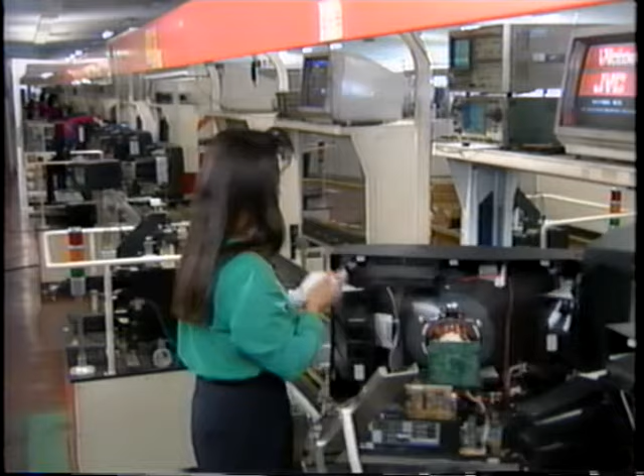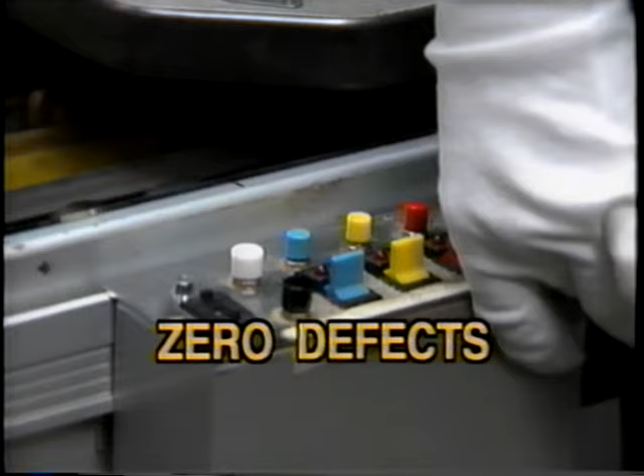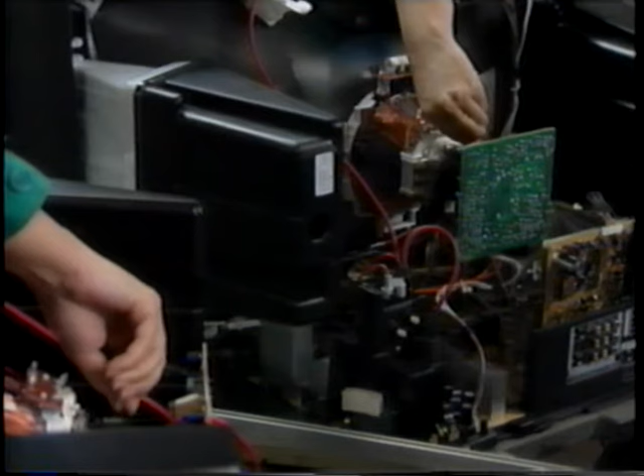The life and soul of all production is guaranteed quality. There are slogans in most factories stating defect reduction targets, but the ultimate aim should always be zero defects. The vital point to remember is that even if we only produce one defective product for every 10,000 produced, that item is still 100% defective to the person who buys it. Poka-yoke, or mistake proofing, is a vital factor in eliminating defects altogether.

Hello. Has it ever crossed your mind that factory production is very similar to creating music? Waste-free production is just like perfect harmony. In music, there are three basic elements: melody, rhythm, and harmony. Each of these elements can be considered beautiful in a skillfully played, well-composed piece of music. The same three elements of melody, rhythm, and harmony are also essential features in factory production. Let me explain.

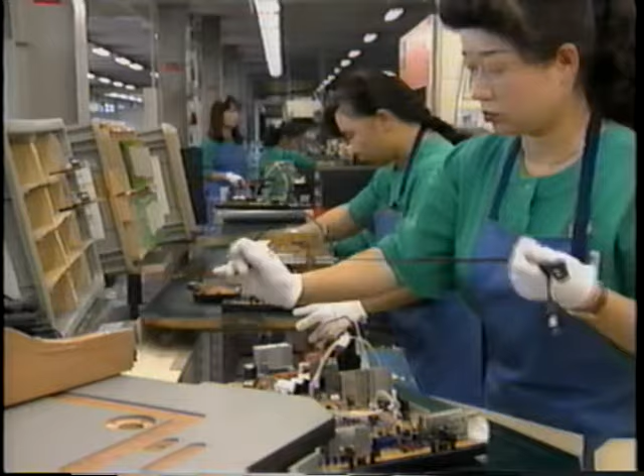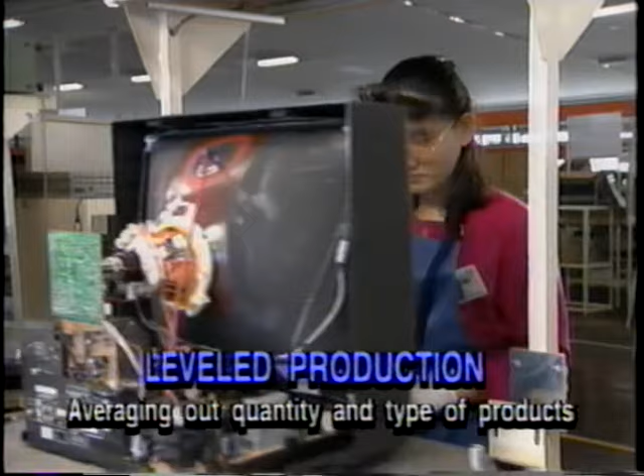First, melody. The flow of items during processing can be regarded as the melody of production. This melody can take many forms: straight line flow, U-line flow, one item at a time flow, and also large lot flow. So melody is found in flow production. Second, how about the rhythm? This is represented by the pitch required for each product. It's expressed as the takt time of leveled production, which is the ideal cycle time.

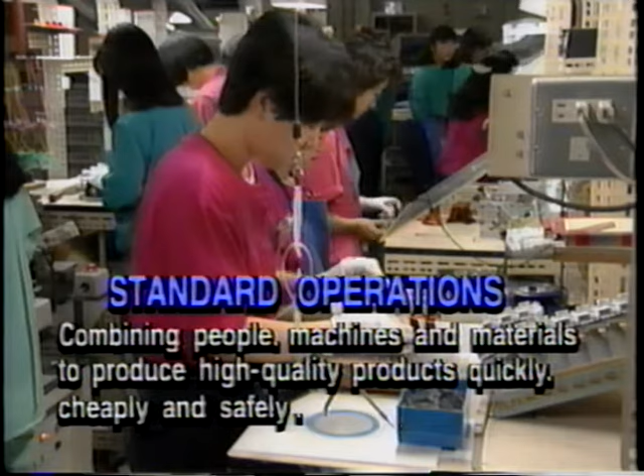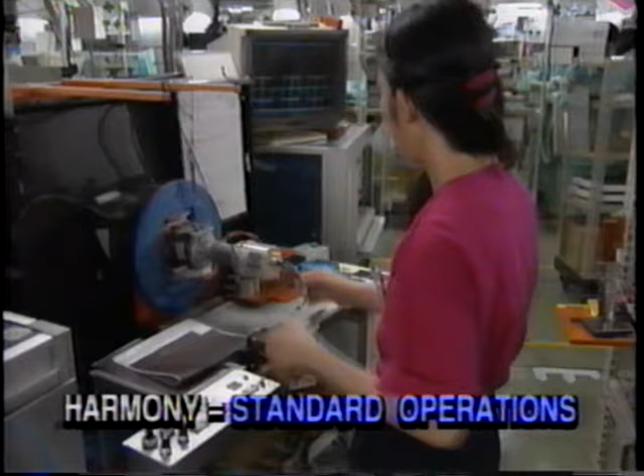And the third element is harmony. In other words, an effective combination of different sounds. Of course, a poor combination leads to unpleasant disharmony. In production terms, harmony is represented by standard operations. They integrate people, machines, and materials into a seamless, harmonious whole in order to create products in an efficient way which is free from waste.

As you can see, the same three basic elements of music are factors behind effective factory production. Flow production creates a melody. Leveled production establishes the rhythm. And standard work procedures build up production harmony. But what happens if something goes wrong? In the case of music, if the melody is unclear, the rhythm unstable, or the harmony off-key, then the result is not music, but noise.

In the same way, good products cannot be produced in a factory where there is anything wrong with any of the three elements. Various types of waste are at the heart of failure to produce good products. And defective production is the most basic form of waste.

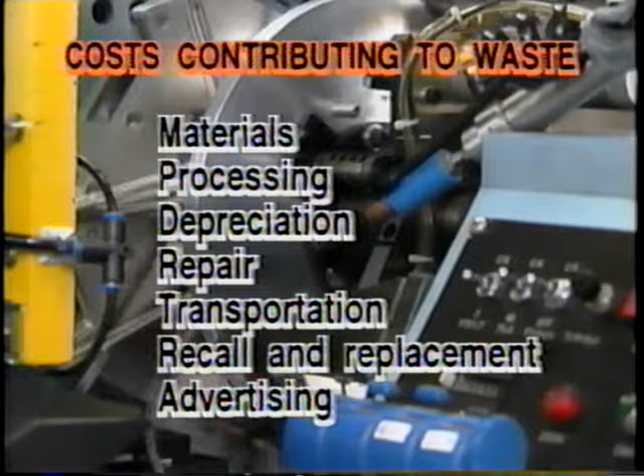Let's begin to consider just what kinds of waste lead to the production of defects. Materials. The first thing that many people think about is the cost of materials as a form of waste. It's true that materials costs can amount to a large percentage of overall waste. However, there are many other costs to be considered as well. Processing costs, for example, or costs of depreciation of equipment and facilities, repair costs, transportation costs, recall and replacement costs for defective products, and advertising costs, especially when there is a need to re-establish customer trust.

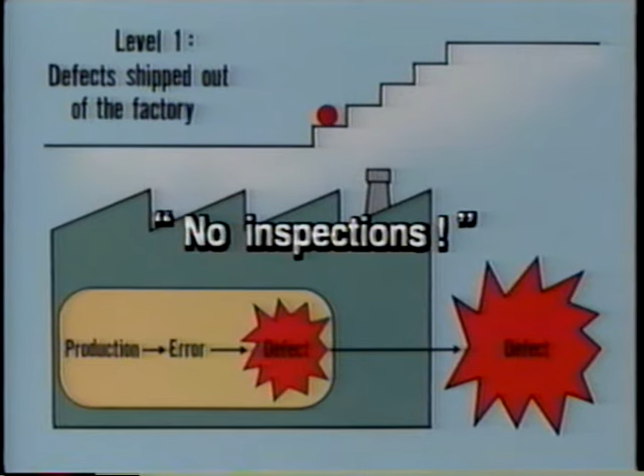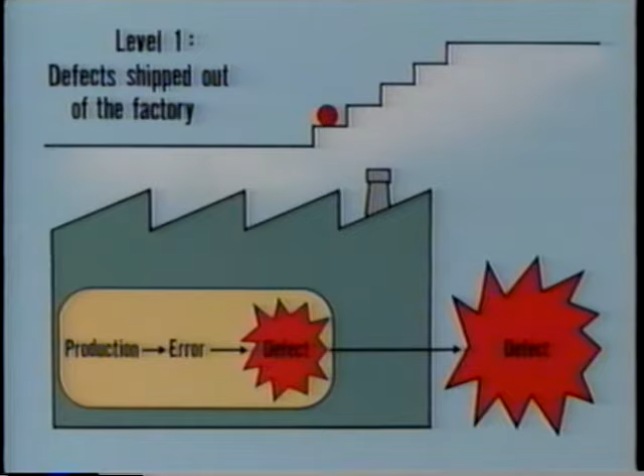Now let's look at ways to guarantee quality. There are 5 basic levels concerned with inspection and how errors and defects are regarded. Level 1 is the most basic level. Whenever there is a lack of inspection, or it is not being fully practiced, defective products will inevitably leave the factory. There will be a constant need to recall defective products and replace them, which means that the company will naturally have bad business results.

Endless defects lead to endless complaints. The logical countermeasure to achieve 0 defects at this level is simply to stop producing products altogether. That will certainly stop the production of defects. But it would be like cutting off your head to cure a cold.

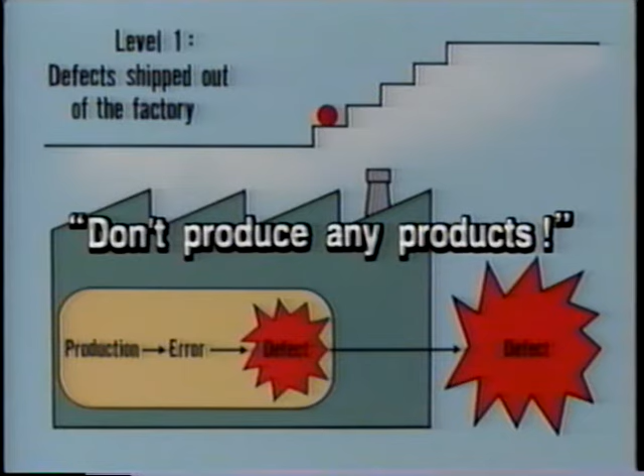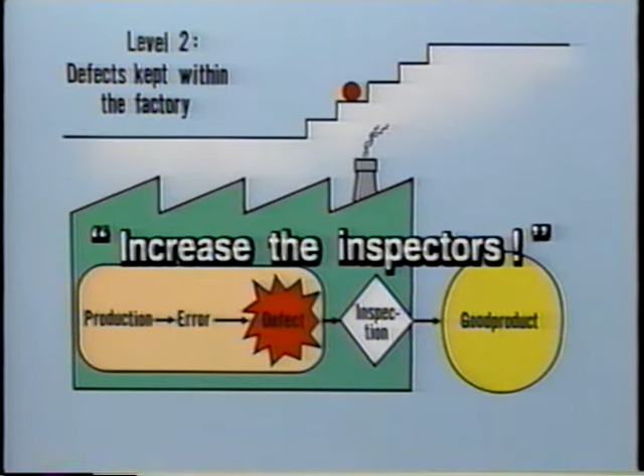Level 2 is where defects are kept within the factory. One company which was tired of receiving complaints from customers about defective products developed the slogan, "Even if you produce defects, don't produce complaints." In other words, their countermeasure against the production of defects was to increase the number of inspectors to sort out good and bad products in order to prevent the bad ones from falling into the hands of customers.

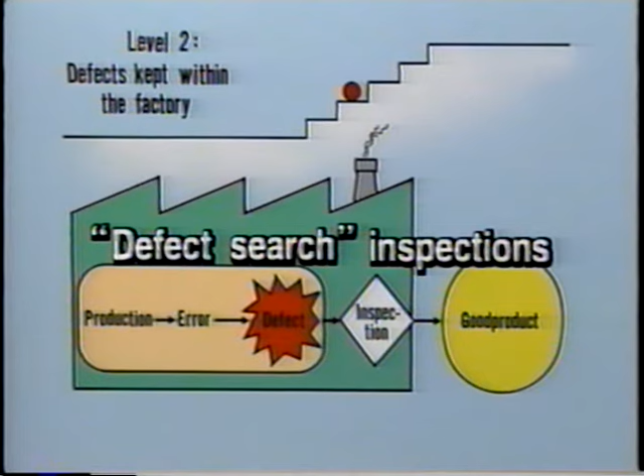But although this may indeed be a way to reduce the number of customer complaints, it doesn't in any way prevent the output of defective products. It simply serves to reduce recall and replacement costs and avoid loss of customer trust.

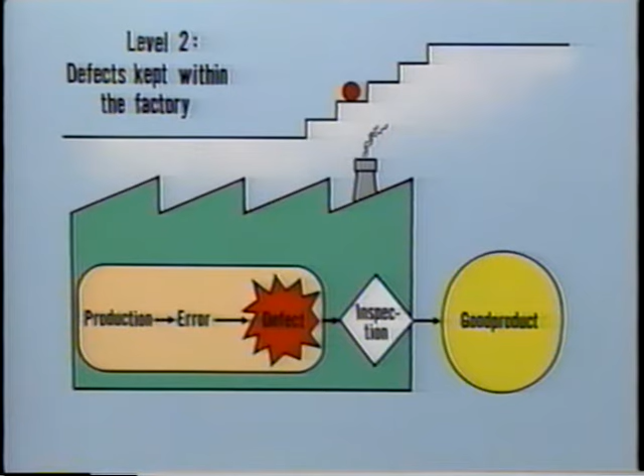Level 3. We now move up to the level where everyone in the company is willing to tackle the problem of defects head-on. A concerted movement is required to counter the production of defective items, and a typical slogan would be, "If you produce a defect once, don't do it again."

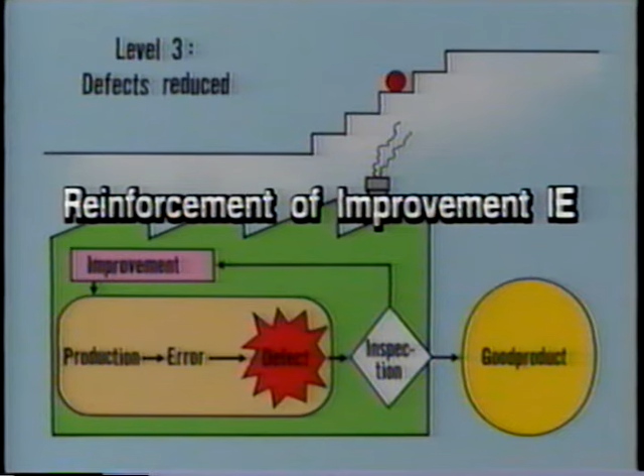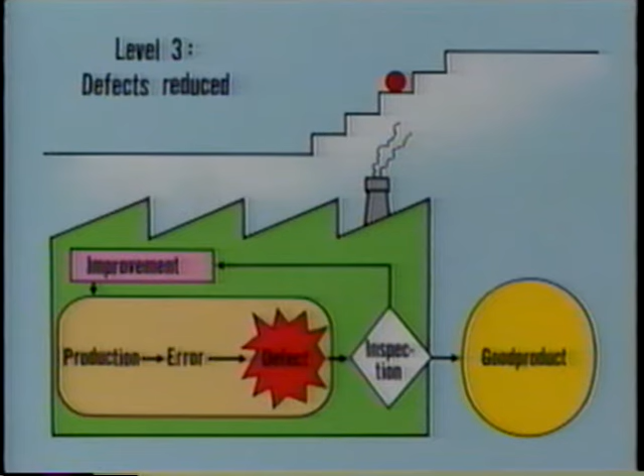Rather than simply increasing the amount of product inspection, the key to achieving zero defects lies in reinforcing improvement. The idea here is to provide the production workers with useful information on how to implement improvements which will prevent the production of defects. This is called improvement-oriented inspection.

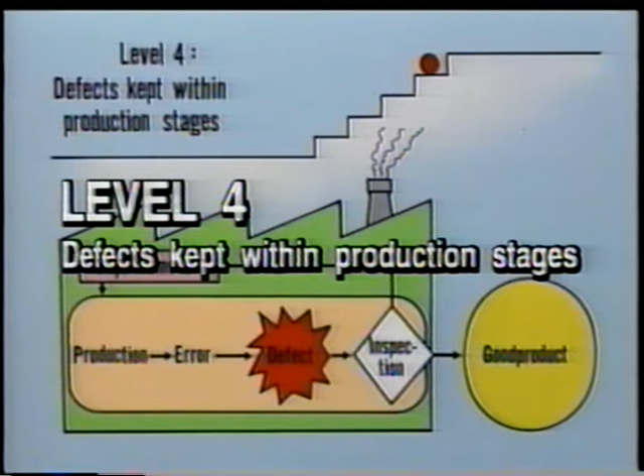On to level 4. This is where efforts are made to eradicate defects at their source. This type of countermeasure can be expressed by the phrase, "Even if you produce a defect, don't let it get away."

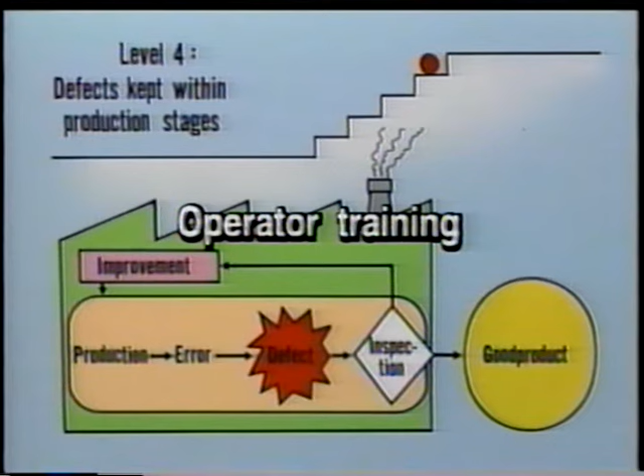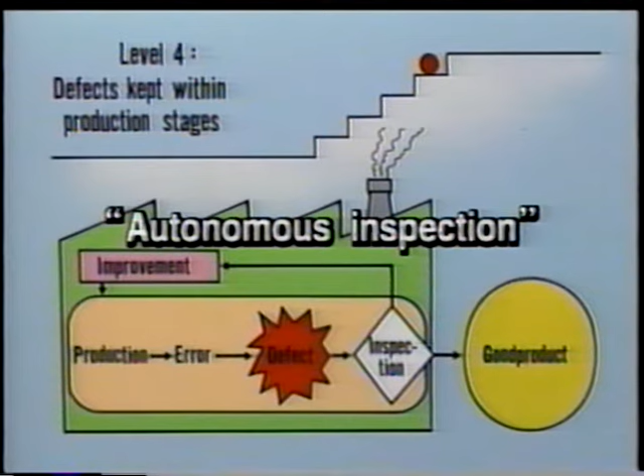What this means in practice is that workers involved in processing must check and inspect themselves within their area of responsibility. In other words, all operators must also be trained as inspectors. This is known as autonomous or independent inspection. This kind of training, to establish all standard work procedures, is an essential part of the movement towards zero defects.

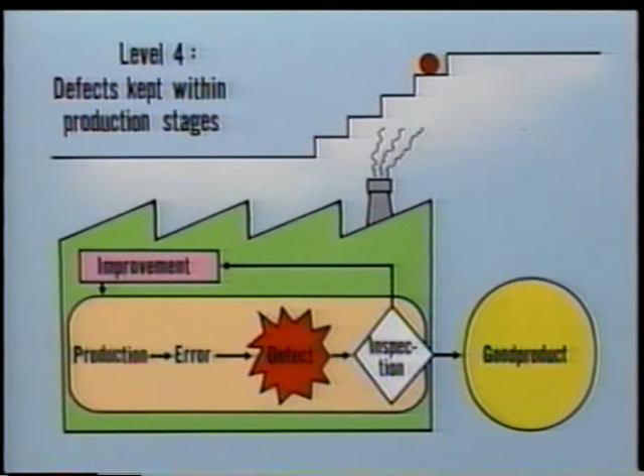And so we come to the final level, where defects are not produced. But remember that if you persist with the kind of attitude that says, to err is human, and defects can never be completely eliminated, so zero defects is an impossible dream, you will never make it this far. The problem at many factories is that they simply increase the amount of inspection going on and erect barriers at the factory exit to prevent defective products being sent out.

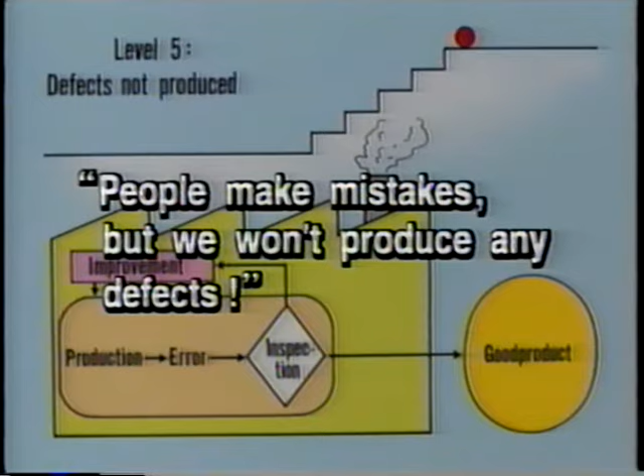But this kind of approach is really based on a confusion between errors and defects. The difference is really quite simple. In factory production, errors are the cause and defects are the result. But unless this difference is fully understood, proper countermeasures to achieve zero defects cannot be made. A fundamental concept to be grasped in any production system is that although people can and do make mistakes, people don't have to produce defects. A typical slogan at this level would be, keep errors from resulting in defects.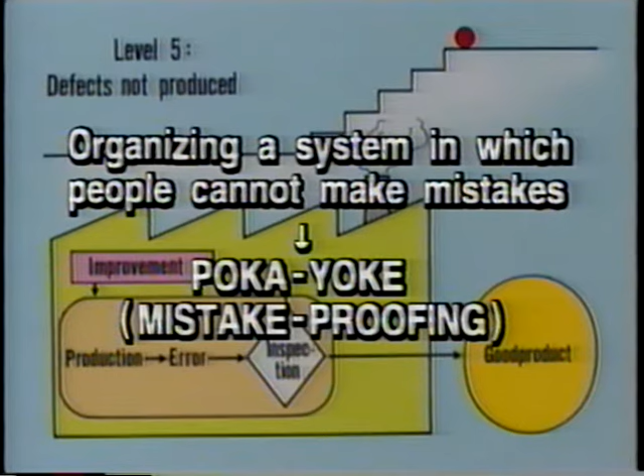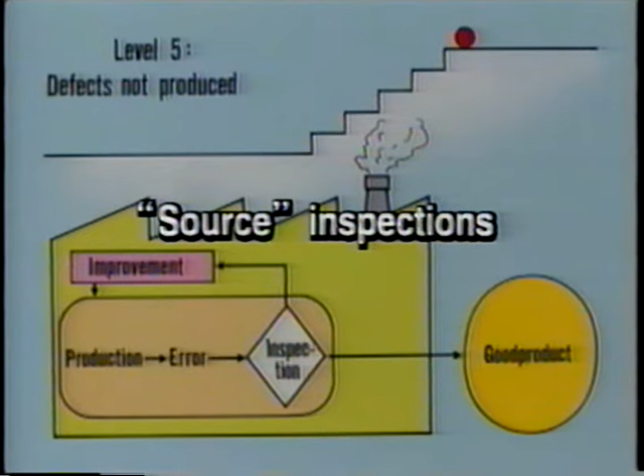This concept can lead to the possibility of creating a system in which it becomes impossible for people to make mistakes. In other words, a mistake-proofing or Poka-yoke system. This concept is known as source inspection. It's a perfect means of achieving the 3 zeros: zero defects, zero waste, and zero delays.

So what level have you reached at your factory? You should, of course, be aiming to be at level 5. And as I said before, production without defects can be likened to a musical masterpiece. So now let's take a look at how we go about organizing a system to achieve zero defects.

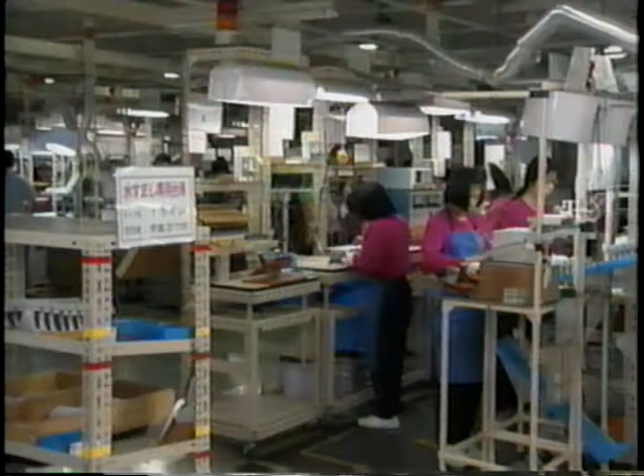The daily work of any production site is based on 5 main elements. Operators receive work instructions and prepare the necessary parts and materials. Then they mount these on their equipment and start to produce items according to operational procedures. In other words, people receive information, mount the materials on the machines, and start processing using the standard methods.

The cause of any defects will be found somewhere in those 5 elements: information, materials, machines, people, or methods. Let's take a look at each of them in turn in order to discover how defects originate. Element 1, people.

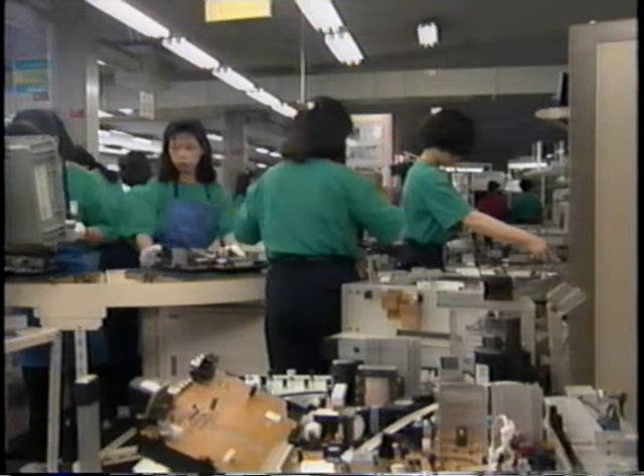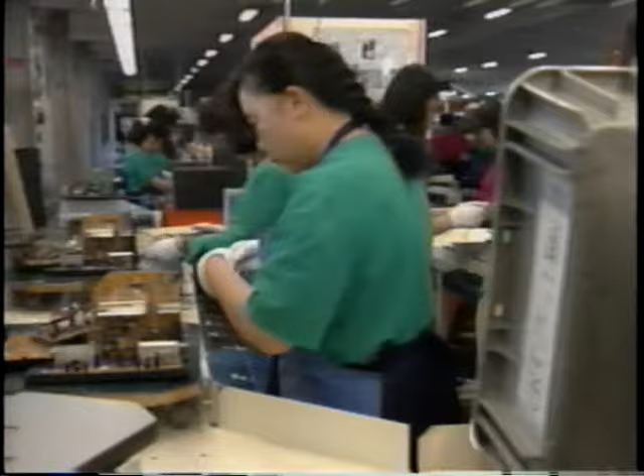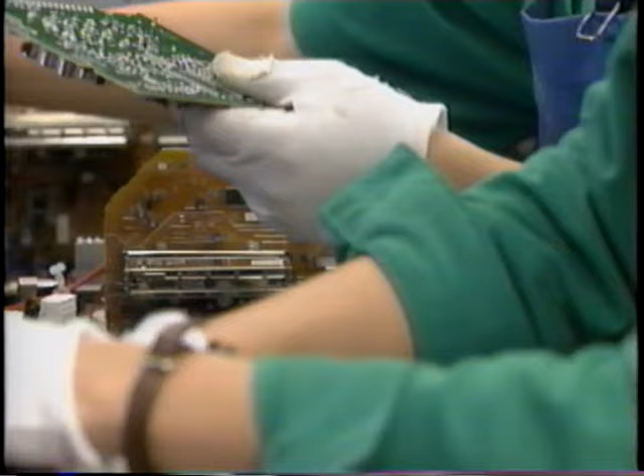But it's not so easy to find defects during actual processing. That is because, generally speaking, every worker is trying to produce good products. And the secret is in the use of flow production and multiple processes. In flow production, each individual product is immediately used in the following process. And in multiple processes, in which each worker is responsible for more than one work process, the operator is in a perfect position to detect.

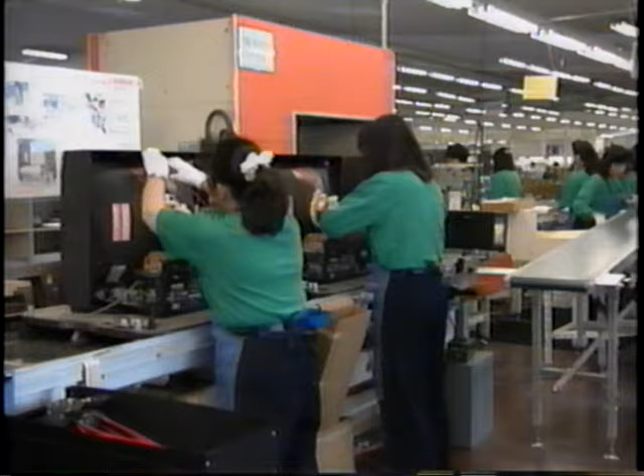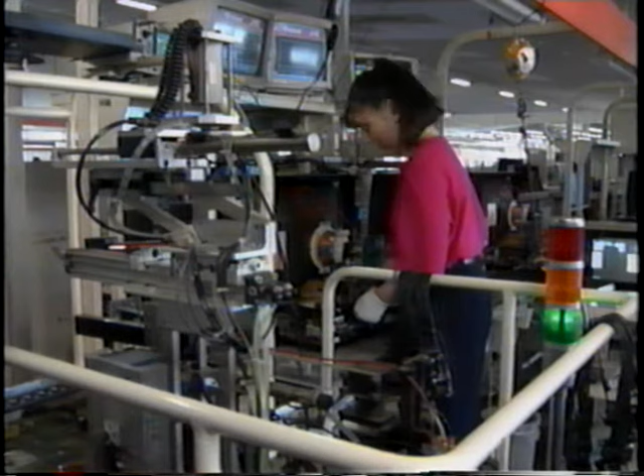Element 2, materials. Spot checking seems quite rational to those involved in production. However, as we've already noted, one defect in 10,000 is a 100% defect to the person who uses that product. And they don't care whether the defect originated in the original materials or parts, or in one of the processes.

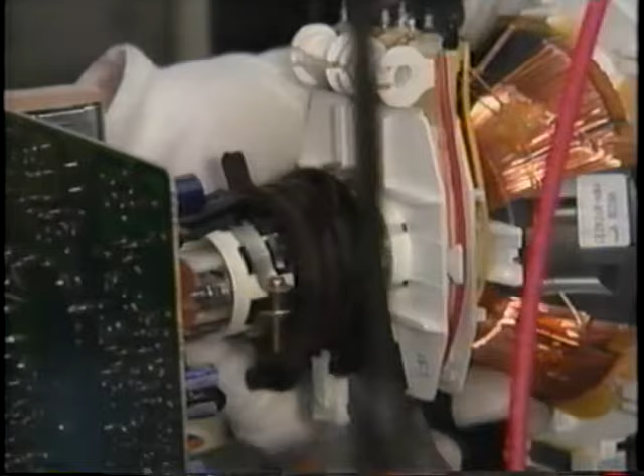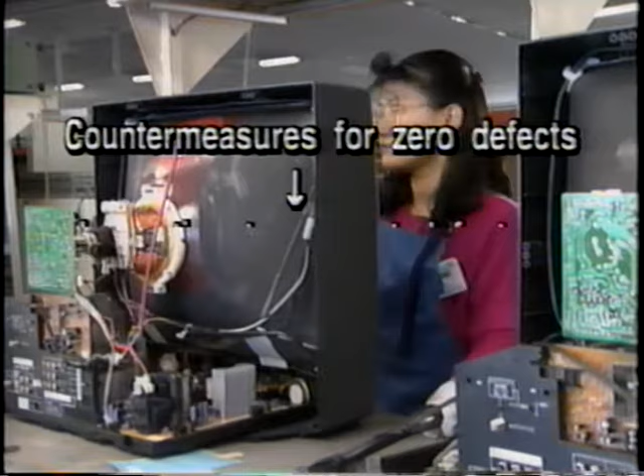The ideal of zero defects can only effectively be reached by total inspection without involving huge numbers of inspectors. What this means is a change from spot checking, which is on the lookout for defects through random sampling, to total inspection, which is designed to prevent the production of defects. The second element in moving towards zero defects is therefore to include basic inspection techniques into the work process. One by one, or one at a time flow production, is the best way to ensure total quality during processing.

Element 3, information. There are many ways in which information can be misunderstood. Errors can creep in when listening, when informing, when recording, or when reading. And the more the errors, the greater the number of defects. It's a basic rule of thumb that errors are most likely to creep in with verbal instructions. However, there can also be problems if all instructions are in the form of writing.

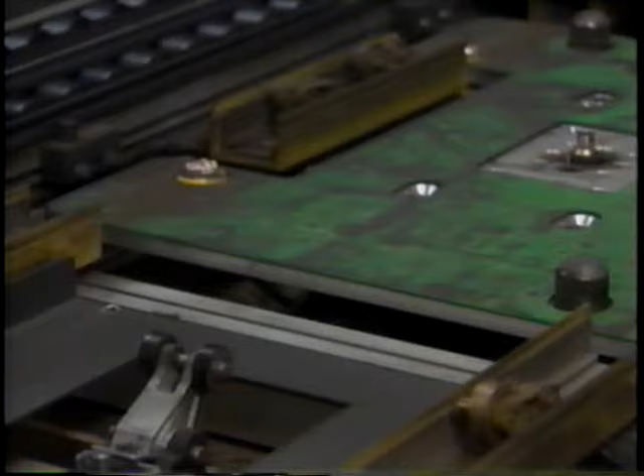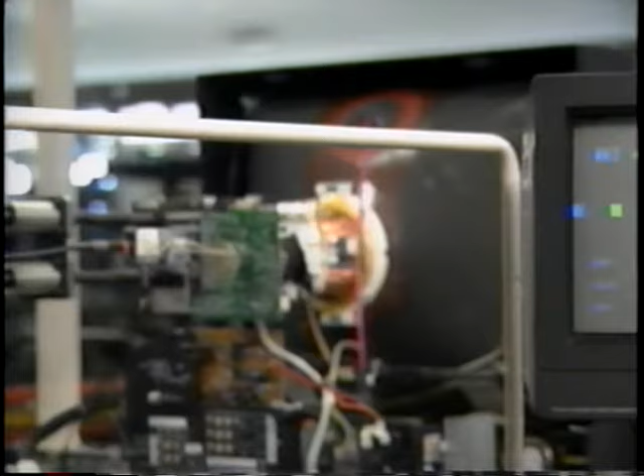So to avoid misunderstandings, the various techniques of visual control are important. They can transmit information quickly and clearly. Visual control is also very important in helping to point out defects at a glance.

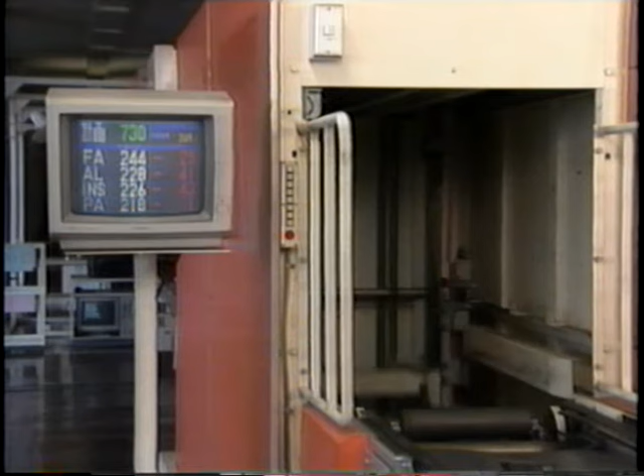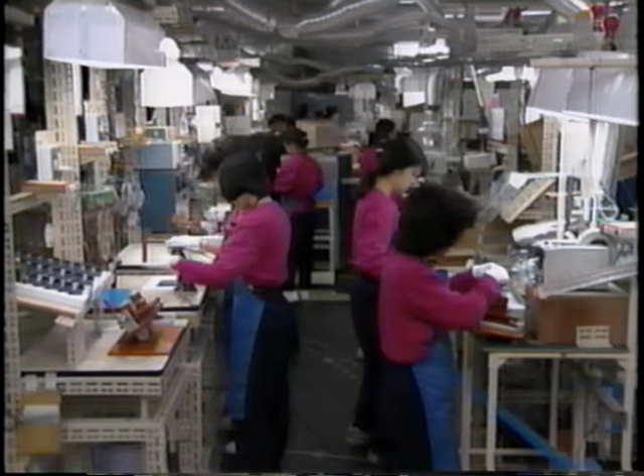Element 4, methods. The means of production employed by a particular company can involve quite a complex situation, since production techniques often have a long and checkered history in tandem with the company's overall business policies. It's quite natural to find a certain resistance to changes which are designed to meet the demands of a new business and social environment. Production habits learned and digested many years ago are not usually very open to innovation.

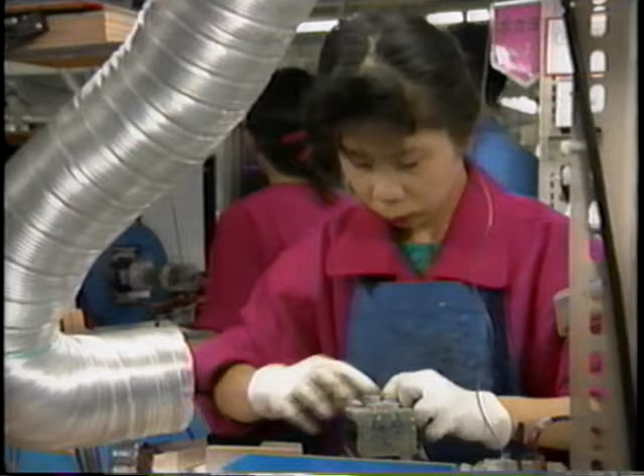However, the base of all production should be the satisfaction derived from creating items of good quality and at a reasonable price, which fully meet the demands of the customer. Production can be based on two very different fundamental viewpoints. Product-out, or product-based production, as exemplified by the large lot type of production which was so popular in the past, produces whatever suits the factory. On the other hand, market-in, or market-based production, concentrates production on meeting the needs and demands of the market. It's vital these days to switch to the market-in production viewpoint.

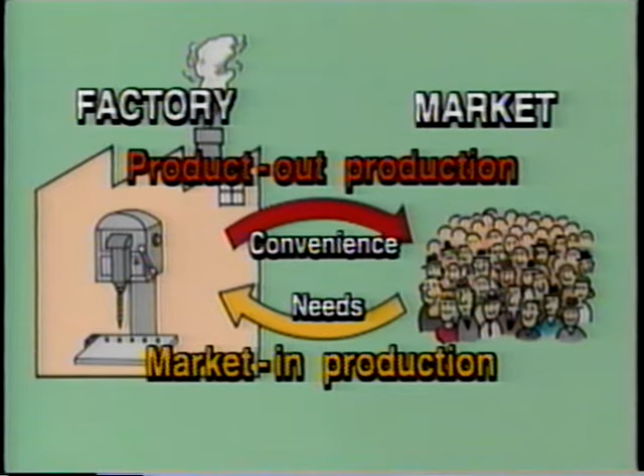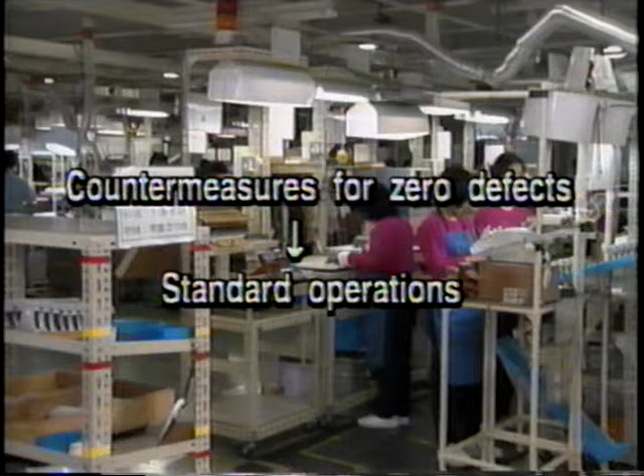Here again, there are two vital elements for success. First is flow production, to control defects and ensure they are moved and checked immediately at the downstream process. And second, standard operations, or standard work procedures, to avoid human errors.

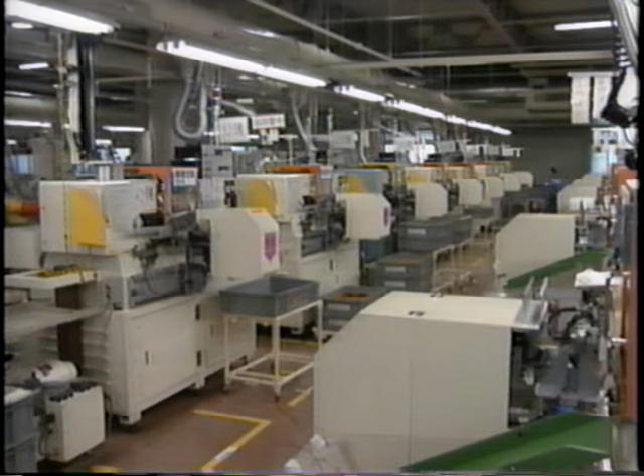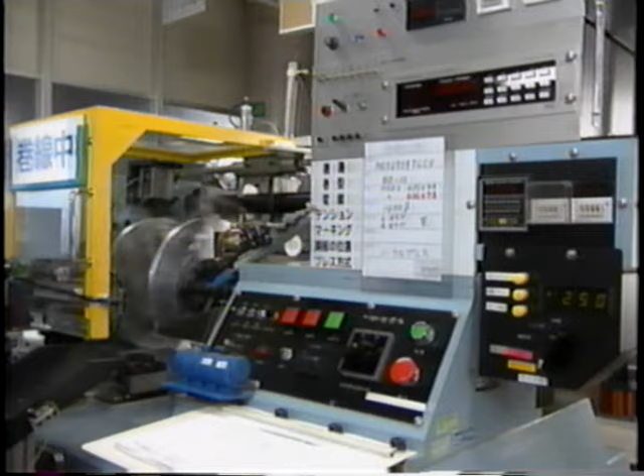Element 5, machines. Of course, machines can produce defects. But as we've seen, most of the time defects are basically the result of human mistakes. Here again, it's important to use machines most effectively by switching from the concept of bulk production to that of production of only good products in the appropriate quantity. Measures to help us towards zero defects include ensuring that machines will cease to operate if they sense the possibility of producing defects, as well as a complete mistake-proofing system, whereby it becomes impossible to produce defects at all.

We've been looking at the basic causes of defects in the 5 main elements of the production process. Now, what stands out is the fact that people are closely connected to each element. What that means is that people are the fundamental cause of all defects. The careless mistakes that everyone makes are known as poka-misu in Japanese. And the mistake-proofing system to avoid defects, even when we make those careless mistakes, is known as poka-yoke. So now we're going to hear from a specialist in poka-yoke, Hiroyuki Hirano, who has introduced the idea of mistake-proofing and zero defects to many companies in Japan, France, and the USA.